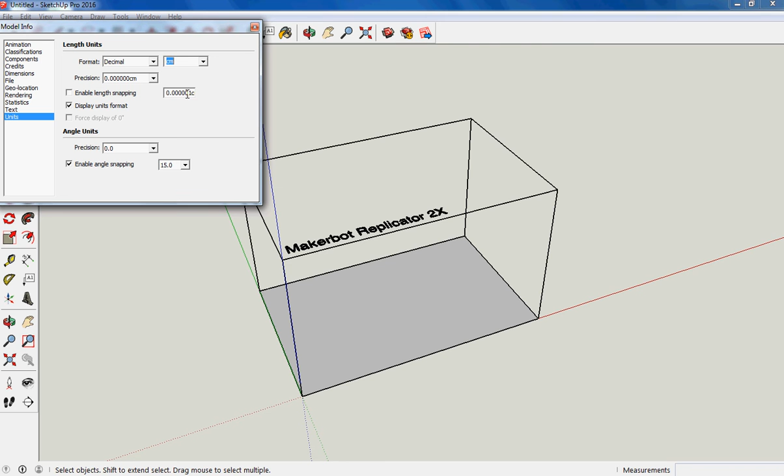At the moment this is set up to work in millimeters, and I don't like millimeters, so I'm going to change that. To change it, I go to Window, Model Information, and here it tells me it's in millimeters, and I'm going to change that to centimeters. I don't need to click OK on anything, I'm just clicking the cross.

If I now randomly draw a shape, if I look down the bottom, it's coming up in centimeters. So I want to clear the space, and to delete things is the delete button on the keyboard.

Now, to make it easy for myself, because I'm just doing a flat drawing, I'm going to go to Camera, Standard Views, and look down from the top. And I want to draw a six-sided shape on here.

Here I've got the polygon tool, which allows me to draw various shapes. At the moment, if I look down here, it says it's a six-sided shape. I could change that to 3 and click enter, and it changes to a three-sided shape, a triangle. But I'm going to change it back to 6 because I want a six-sided shape.

I'm going to draw right in the center, and draw out to the side. Now the maximum size I can draw is 10 centimeters. This is a radius, it's half of the size of the whole thing, so my maximum size is 5, and I've now got a hexagon which is 10 centimeters from side to side.

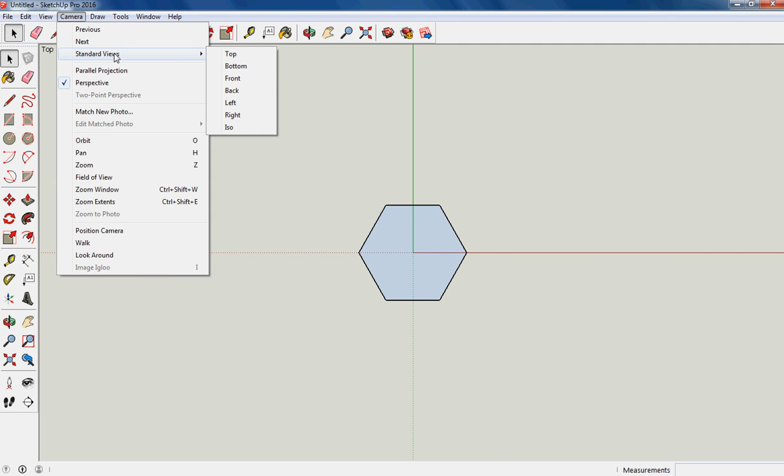I can check that with the measurement tool. Click here, go to there, and it tells me it's 10 centimeters from there to there, and that's its biggest measurement, so that's okay. I'm now going to use the camera and go to a standard view, and go to an isometric view.

Now there are two ways I can draw this as a cylinder, and I'm going to show you both of them one after the other. So the first way I'm going to try is by making the cylinder first and then bringing the center down.

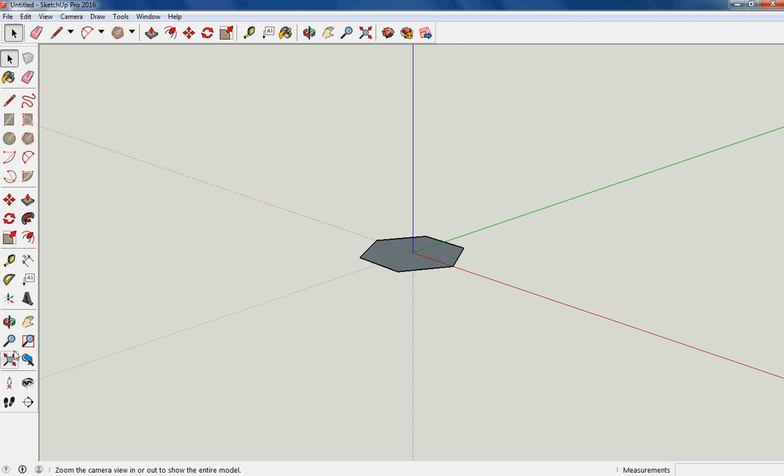So I'm going to make it fill the screen, which is this button here, the magnifying glass with the arrows around it, and I am going to click on the push pull tool and push it up a touch, let go of it, and it tells me at the moment that is 0.48 centimeters tall.

My maximum is 10, so I'm going to click that in at 10. If I now click on the magnifying glass with the arrows, it shows me that my cylinder is now 10 centimeters tall. So I want to now put a shape on to bring it down.

So I'm going to zoom out a bit, I'm going to roll my mouse back, and I'm going to change the angle on here so I can see the top. Now I want to draw the same shape on the top and then pull it downwards.

The simplest way to draw the same shape on the top is with the offset tool. So this is the offset tool here. Bring it near the edge and drag it in, and it draws a line exactly the same shape but slightly smaller. The distance it's drawn it in from the edge is 0.76 centimeters.

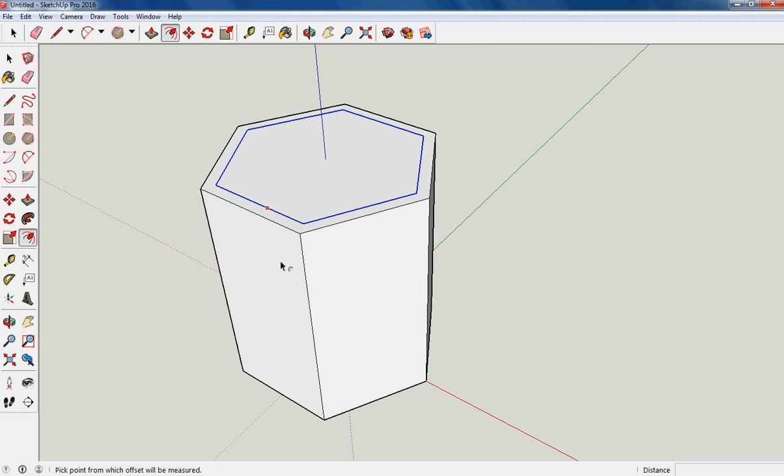Well, I want mine to be 0.5 centimeters, and there it is. I want to drag this down so it's got a 5 millimeter or half centimeter thick base. The whole thing is 10 centimeters, so to get it down to within half a centimeter at the bottom, I drag it down 9.5. So drag it down a bit, let go, then type in 9.5 and enter, and that is my shape.

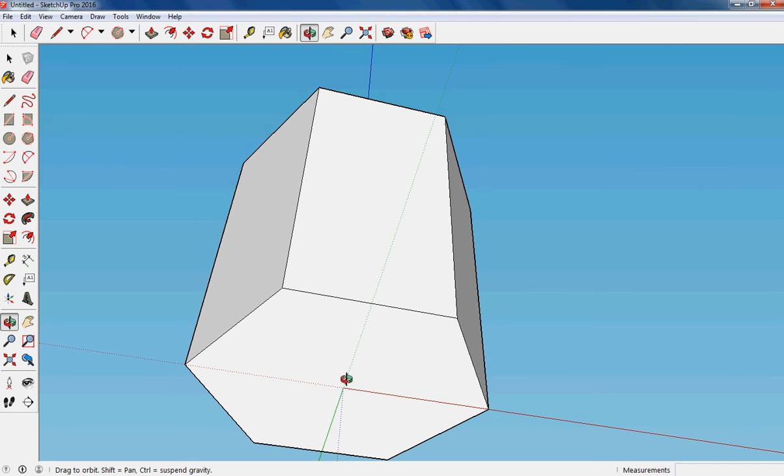If I rotate that around, I can see that that is the correct shape that I want. The other way of doing it, if I go through Edit, Undo, or Alt and Backspace -- I've gone too far back, so I can redo it with Redo It -- and I rotate it around so I can see it, and go Camera, Standard Views from the top.

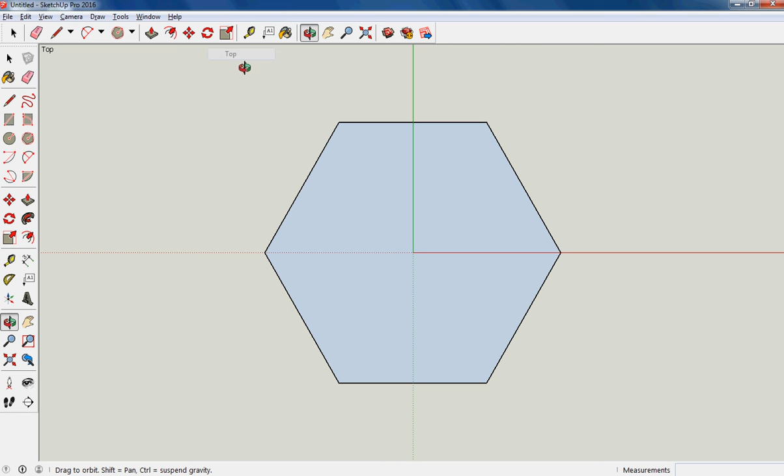The second way I can do this is to do the offset first. So offset, bring it in. I want that to be 0.5. Now I've got my two lines.

I can go Camera, Standard Views, Isometric, and do the inside one first. I'm going to drag that up, 0.5 and enter. So I've done the base first, and then I can drag the outside up, and it goes so far and stops. Then once it's stopped, I can do it again.

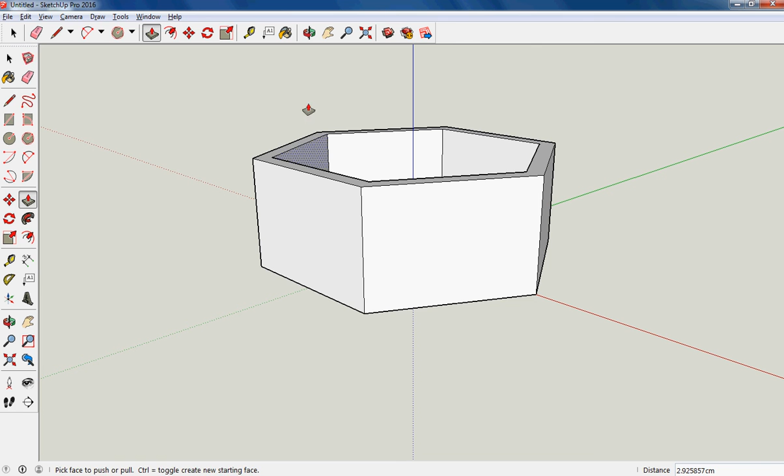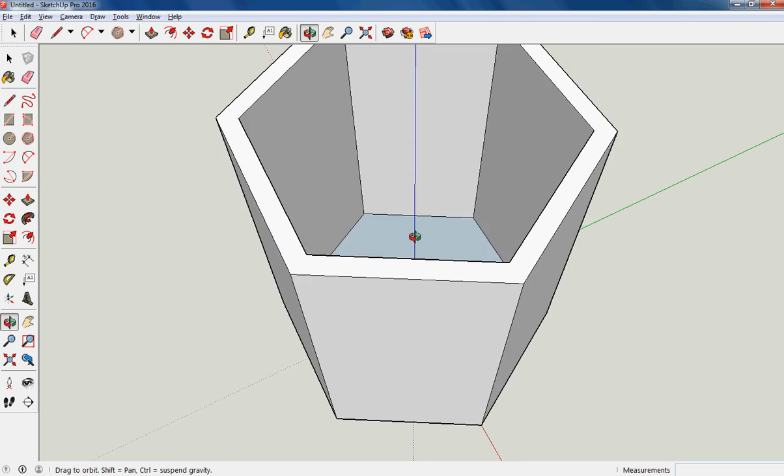So I undo that, edit, undo it. You have to do it in two steps. The first time you pull it up, it'll stop on the same level. Let go, and then I can drag it up, and that needs to be now 9.5. Enter. Again, if I look at that and rotate it around, that is my completed cylinder.

So what I need to do now is change it to a standard view and isometric and make it fill the screen. I now need to save that.

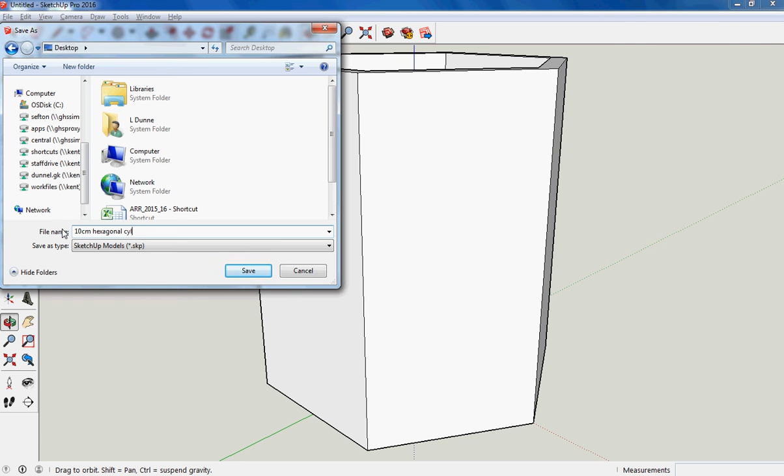I don't want to start building other parts in there, I want to save that part. So File, Save As, and if I just bung that on my desktop for now, and I'm just going to call that 10 centimeter hexagonal cylinder, and saved.